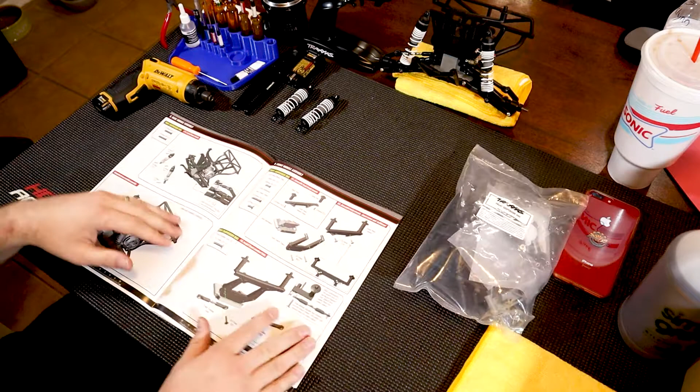What's up everybody? Welcome back to the Slash Kit build from Traxxas. Today we are working on the front suspension, so you're going to need your front suspension bag, as well as the front shocks that we built in the first video. If you haven't seen that, go check out the rest of the build series - I'm assuming if you made it this far, you've been watching along. This is part B in the manual, from page 17 to 22, and then the front module assembly, so everything for the front assembly that's going to get bolted right to the chassis. When we're done, we're going to have something that looks like that.

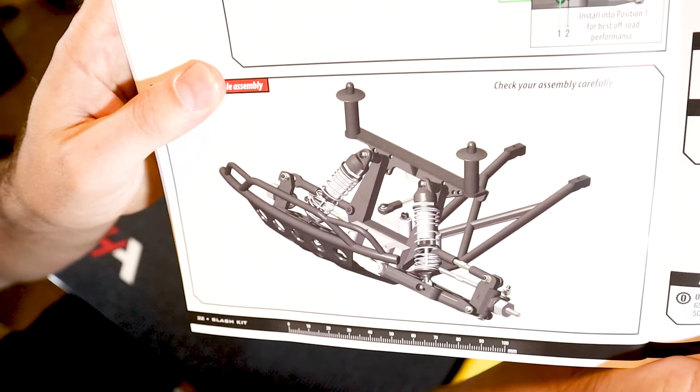So first things first, let's get this bag opened up, get all the parts out and situated so we're well organized and ready to get the build going.

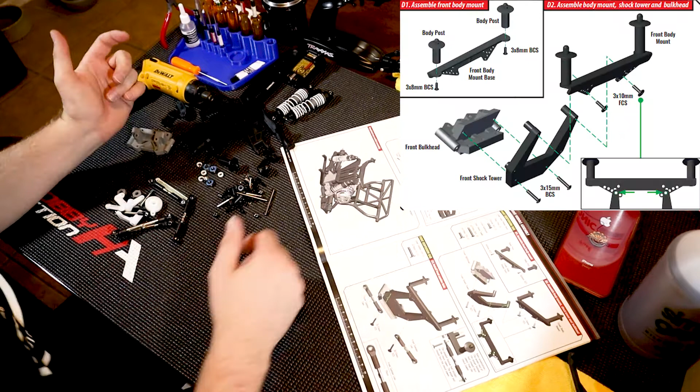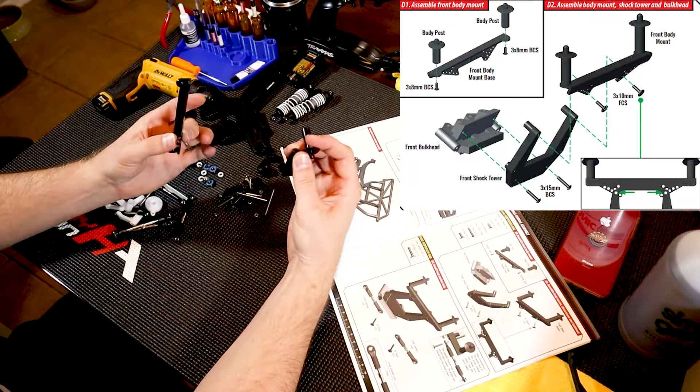So the first step is going to be starting right in the center of the whole front suspension. You can start with your bulkhead here, and your body posts and everything. So let's get these body posts mounted up. You're going to need your posts, cross brace, and some 3x8 screws.

These are just going to get bolted right up, and you'll obviously have your hole there for the pin to go through. You're going to want to line that up - typically front to back is how we do it. On the front, since there's that cowling on the body, going sideways doesn't necessarily make it that easy to get the pin in and out. So if you just line these up front to back and then tighten them down, you should be pretty set.

Got that all set to go - that's going to get mounted to the front shock tower. Not really going to matter what step you do this in. You can either put the shock tower on the bulkhead first, or mount your body post to the shock tower.

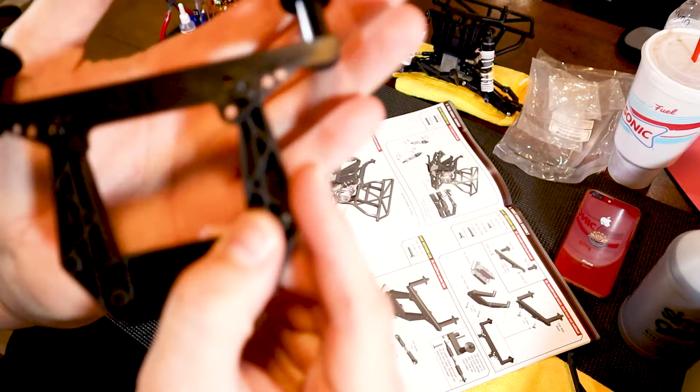Use the 3x10 screws with the giant head on them, just like your motor mount screws that you did in the past. You'll want to pay attention to the orientation on these, since the manual shows you which holes to go into - definitely pay attention to that, you don't want to put them in the wrong holes. Once those are on there, you should have it. As you can see, you've got the row of holes on the bottom, and then you've got the one up - you're going to use the one up on both sides.

Then we can get this guy mounted to the bulkhead, which uses some 3x15 screws. You're only going to be able to get the tower in there one way where the holes actually line up - basically you're going in from the same direction that you did the body posts. Use your 3x15 screws and tighten those down, and it should look like that.

Going in from the back side here - this is going to be the front of the truck, so it's going to be facing that way. Now you're going to get your longer screws with the giant head on them, and these are going to mount your camber links.

And like my last video, you saw me talk about this notch or marking - you can see how part of it's got that line in it. You always want that to the left side of the vehicle. So if you do all of your rods the same way, to the left with that marking, all your adjustments when you go to adjust your camber or your toe are going to have the same effects, instead of turning one clockwise and one counterclockwise - so you get the same effect, you know what I mean. Make sure you're orienting them the right way.

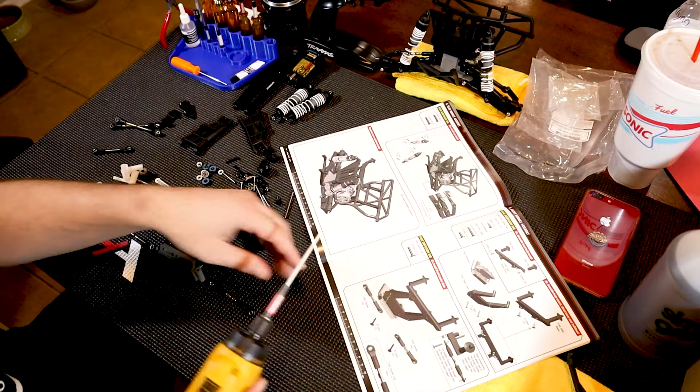There's only one hole on the tower that those are going to mate up with, so it's pretty hard to get confused. Then you want to keep in mind that there's two different size hollow balls.

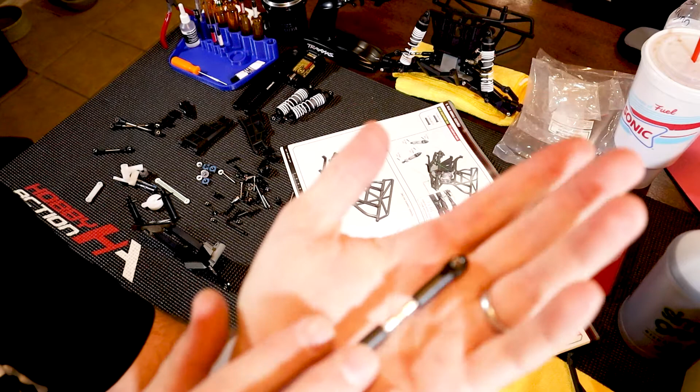It's the smaller hollow ball that gets put on the inside here on the tower. So you've got your link - there we go, you've got your link. You can see the shallow ball there, and then on this side you've got the wider ball. It's the shallow ball, the narrower one, that goes in on the tower.

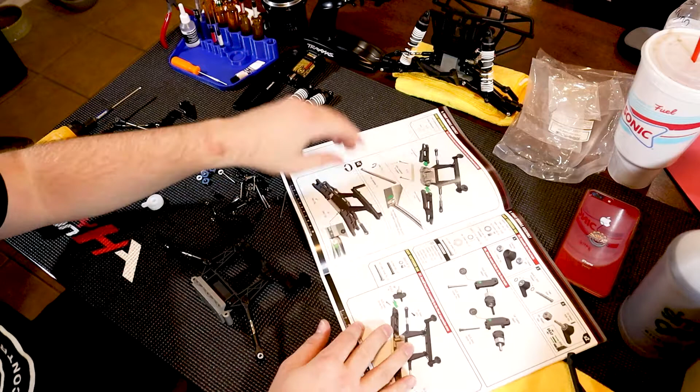Just make sure they're nice and free. You don't want any binding on any of your suspension parts, so always make sure you don't over tighten any of that. You want them nice and free moving so we don't get any unwanted binding in the suspension that's going to cause weird behavior from it.

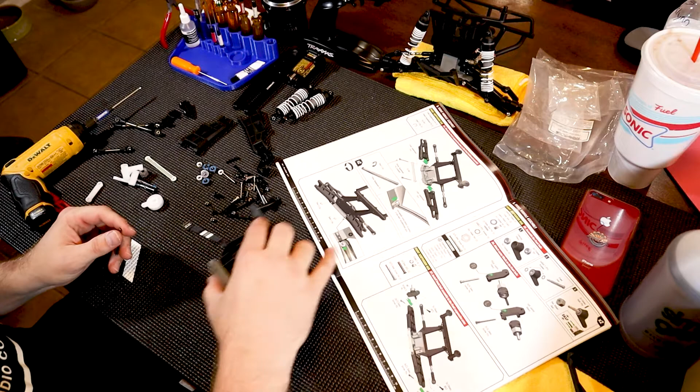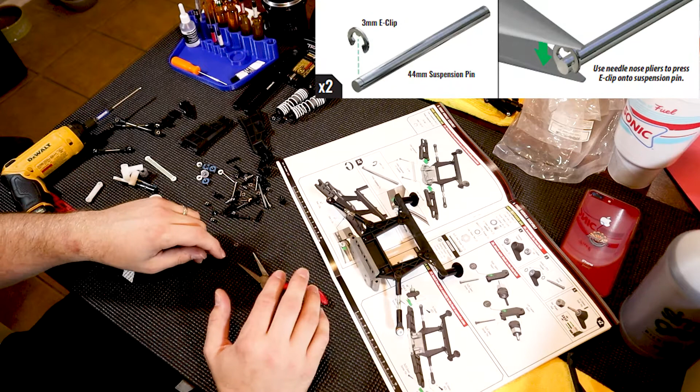So this might be the worst part of the build. You've got the two inner rods here that are going to hold your control arms on, and these parts actually use the old style E-clips, which can be a bit of a pain. You'll definitely want some pliers, and just take your time with them. Don't try to push it on there if it's a little cockeyed, because it can spring load it and then fly off, and you end up losing the clip.

Go ahead and get both of the rods, and then put a clip on one end of each of them. You can go ahead and put that clip on before we go any further, just on one end though - don't do both ends - but it'll snap on into that groove.

Not really the easiest way to do it. Just take your time and make sure you're not forcing it and causing it to pop off and fly in a certain direction. So just line it up and then click it on. Don't do what I just did.

So you've got both your pins with an E-clip just on one end of them, and then we can use that to slide everything through and then lock it in.

Now these arms, unlike the rear arms, aren't left and right - they're more universal, so they'll work on either side. Just make sure you have them facing the proper direction with your lower shock mounting holes on the front side of the vehicle. As long as you've got that, everything should be set.

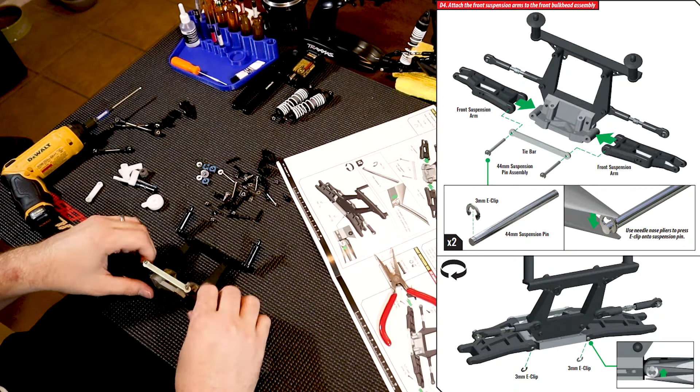They also use this fiberglass tie bar up front for a little added rigidity, just to strengthen it. So you can put that on both your pins, like so, and then slide your pins from the front on both sides at the same time through your arm, through your bulkhead, and all the way through. It should line up and go out the other side.

When they're sticking out the other side, you can do the clip on the back side now, so you're going to have to get a clip on both of those pins just like you did the other ones. It's going to be a little more difficult just because it's already mounted to the body or the bulkhead. So just take your time, use your pliers if you need to, get them on there. They give you a little pointer in the manual, but it's not always the easiest thing to do.

So this is probably the most frustrating part of the build. Everything else has been pretty straightforward. Maybe that's why they pre-built the shocks - because they felt bad for you having to use these, but still.

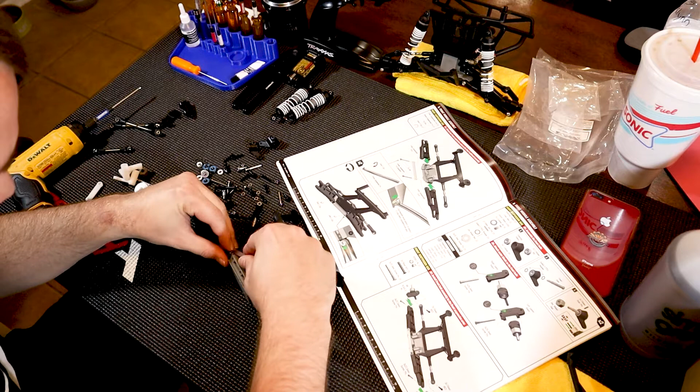Definitely don't want these flying off, because I'm looking through all the screws and stuff here. They don't give you any extras of these, unless there's some in that extra parts bin, but definitely don't want to lose these. If you do, you're going to the hobby shop to buy a pack of their Traxxas part number 1633. Don't ask me why I know that, but that's got their assortment of all these extra clips in it. So if you lose one and need more, Traxxas part number 1633 will get you what you need.

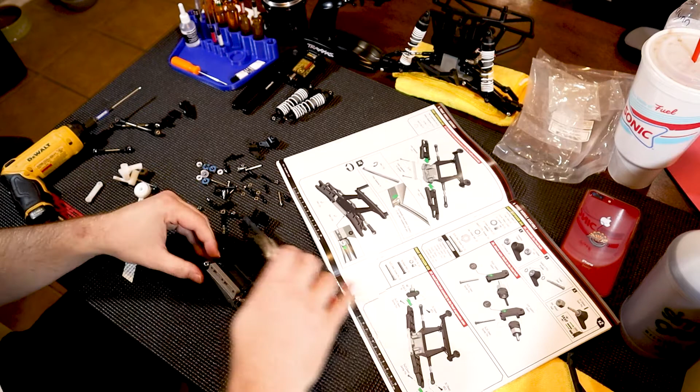Alright, got those on. Frustrating part, consider that over.

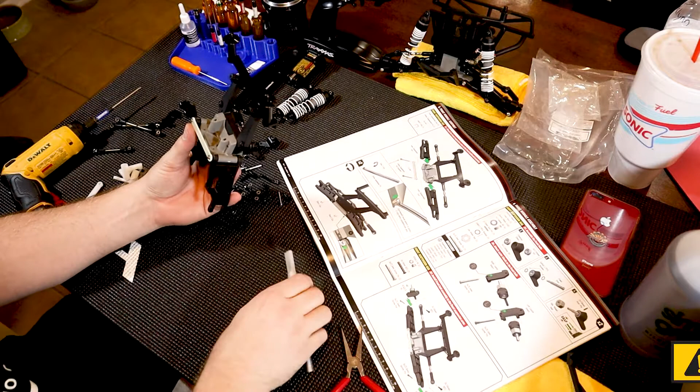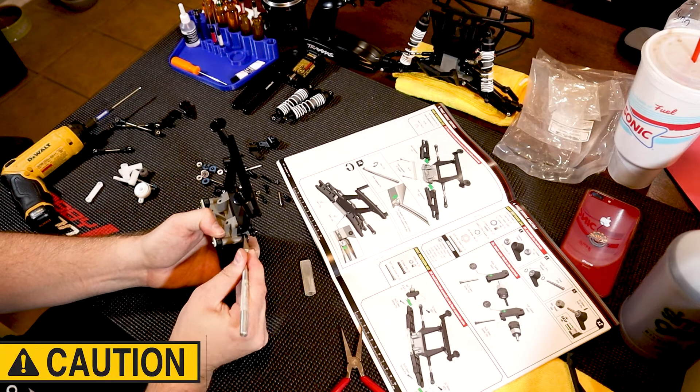Definitely want to move your arms, make sure they're moving freely. That one does, but this one's binding a little bit, so I can see a little material where they cut it off the runners when it was molded. I'm just going to get my knife in there and take some of that material off so it's not rubbing, and that should free it up. Just be careful using a knife, don't cut yourself. Take a little bit off, it's not going to take much. There we go, nice and freed up again, the way it should be.

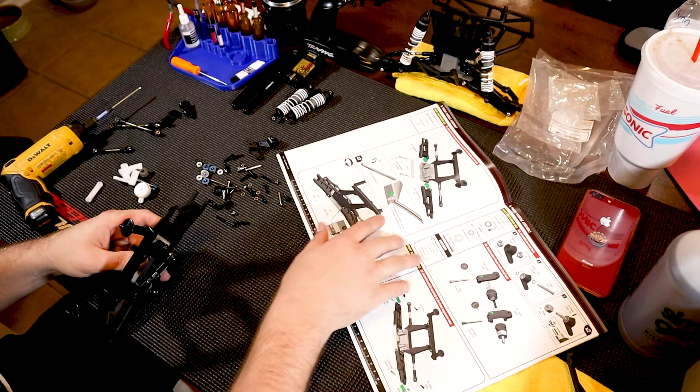Now that we've got that done, we can start building the front caster block and hub assembly.

So you've got your caster block and your steering block. Your steering blocks, these guys here, are universal, so those will work on left or right. Your caster blocks, however, which are these guys, have an L and an R on them, so you'll want to pay attention to orientation. They definitely have a right side versus a left side, so that's something to pay attention to when building them. Right here in the manual it shows the right side and the left side, so make sure you're paying attention to the orientation.

But first we're going to get the bearings into the bearing carriers, or the steering blocks, and make sure they're seated all the way. They can be a little tight, so make sure they're seated properly. You don't want to bind up the drivetrain at all because they weren't seated properly.

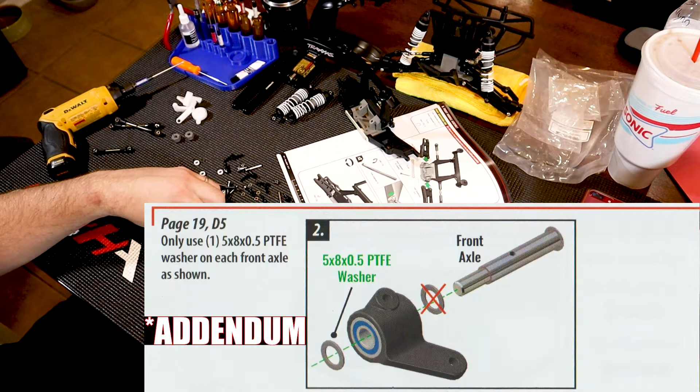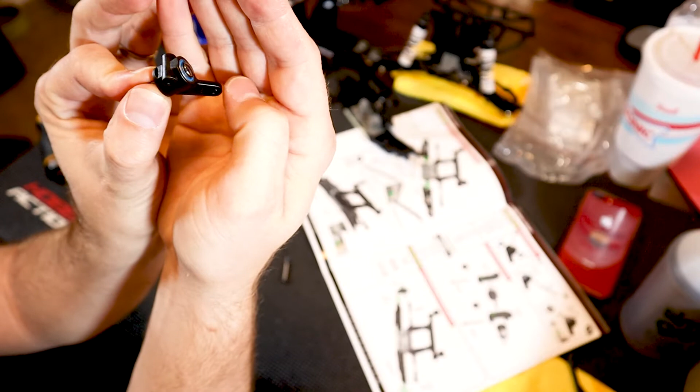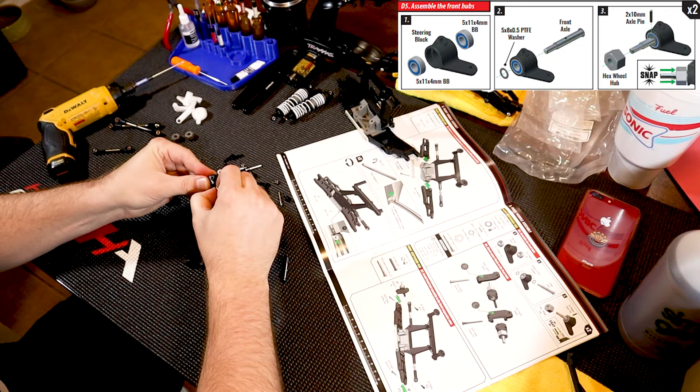Then just like we did in the previous video for the rear axles, you're going to have your pin that goes through, and your hex is going to snap onto that. This is the front end, so these hexes are a little different than the rear hexes. They're a little wider, but that gives you the proper offset for front versus rear. Just like the rear in the previous video, they're going to snap on, so you can hear the snap. Push them firmly, they'll snap on, line up the groove. You've got a groove in the hex that's cut for the pin, so that'll line up with the pin, and that's what it's snapping onto.

Snap, crackle, pop. So right, left - these are important that you get in the right way, otherwise you're going to be limited on your steering and wonder why you don't have full steering. But basically just line it up like the picture shows you here with your right versus your left.

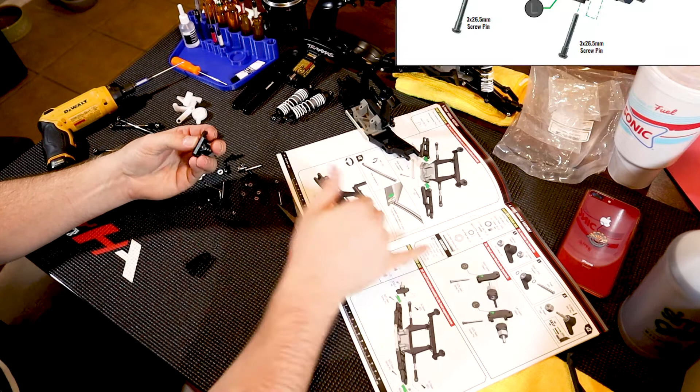And then you've got your long screw pins here with the fine thread on them. There are two different size lengths, so you definitely need the longer of the two for these ones. Pick out the two long ones, put the two shorter ones aside - those are for the next step.

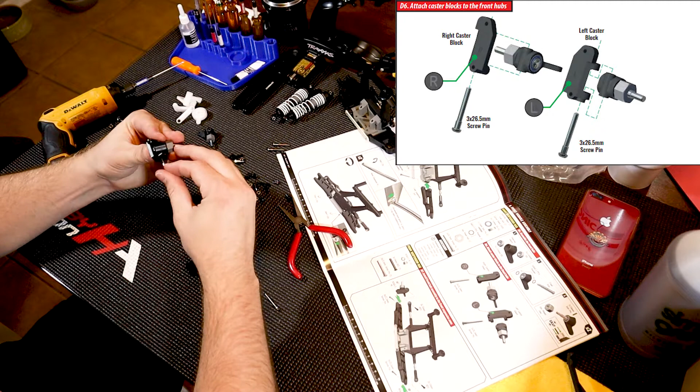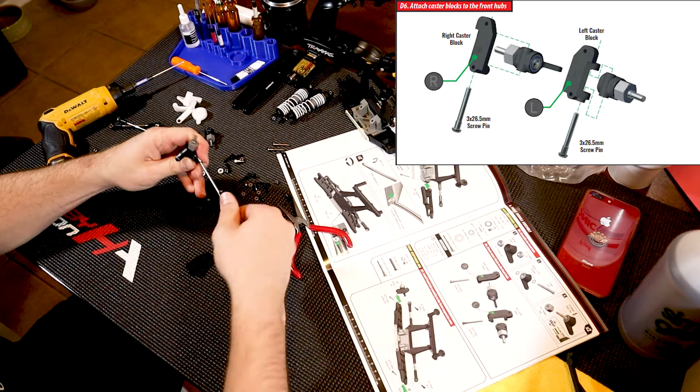So the two long pins are what you're going to use, and you're going to go up from the bottom and slide it all the way through the steering block, then line it up with the top hole on the caster block. Once that's done, you can thread it in and tighten it up.

Make sure everything's nice and free, don't over tighten that bolt. You don't want to do that because then you'll bind up your steering and cause more stress on your servo, which you don't want to do. The servos are under enough stress as it is.

Rinse and repeat for the other side. Just make sure you're orientating it in the proper direction since it's the left side versus the right side. Nice and free - those are all set.

And then with those built, we can bring the front end back into it, and we're going to end up using these screw pins and getting everything mounted to the chassis. So we're going to mount everything on the lower end first, and then we'll link it up with the camber link on the top end.

So use those shorter screw pins that you set aside, and use those on the bottom here. Slide them through just like we did for the steering block, slide them through and then thread them in. Again, make sure you don't over tighten them because you don't want to cause any extra problems in the system, so that the suspension can do what the suspension needs to do. Just snug them up, make sure everything is free.

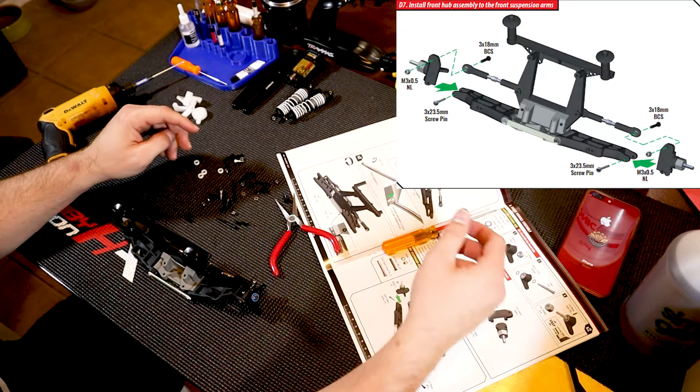Alright, nice and smooth. You've got two M3 nuts that we need, as well as two 3x18 screws, which are those guys. These are what we're going to use to mount the camber link, which is going to mount up to the top of the caster block here. Put the screw through the back side, and then once that's all the way in, you're going to secure it with a nut on the other side.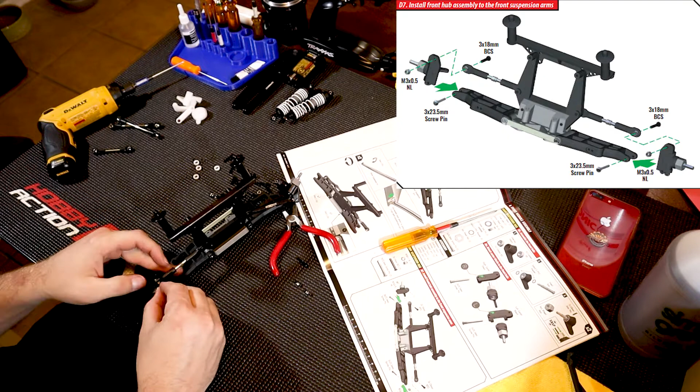To lock everything in, so that way it can't back out on its own. You definitely don't want that backing out. Once you got both of those screws in, just go ahead and do your nut on the back side. You'll probably need a driver in the screw and then a nut driver on the nut to fully tighten them down. Otherwise you'll start tightening up the nut and it will just back out the screw. So use your driver and your nut driver and tighten both those nuts down, making sure they're nice and tight.

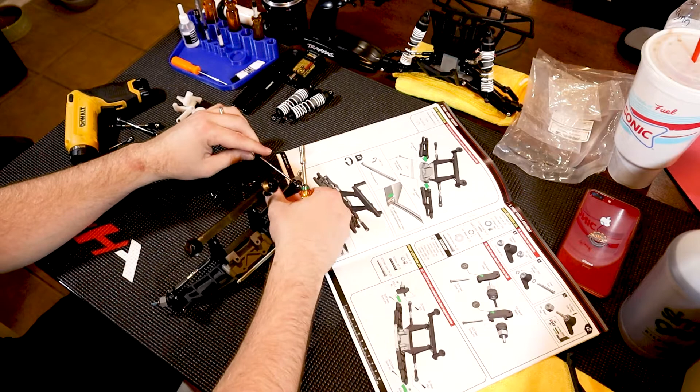These are nylon lock nuts, so they shouldn't back out under use while you're driving the truck. As long as they're tight now, they should stay and pretty much not go anywhere forever unless you take them off. Set that aside for a minute because we got to start working on the steering rack.

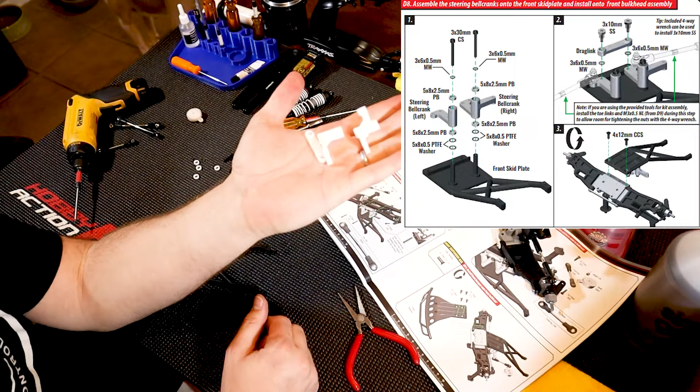You've got all these three pieces here are for your steering assembly. This is what's going to build the rack that translates the steering servo movement into turning the wheels. So you definitely want to pay attention to the order of stuff. You got a lot of use of the PTFE washers and everything, so definitely make sure you didn't lose any of those. Looks like you need 4 total.

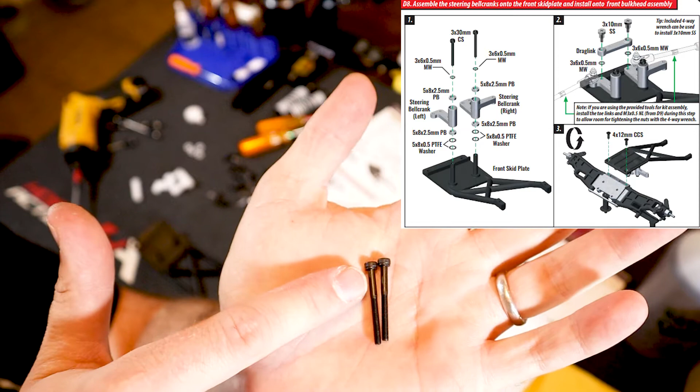You got these little white bushings that they're using instead of a ball bearing. Those are going to go into the steering rack too, and then you've got some other washers that are going to go on top, and then you've got your 3x30 screws. They're the only screws in the bag that aren't fully threaded, so you can see the non-threaded part there. These are the screws you need to mount the bell cranks to the skid plate. That's what they're going to pivot on.

So we want to go ahead and put all these bushings in the openings, making sure they're pushed in all the way. If they're not, they're going to cause resistance in it, and that's going to put more stress on your steering servo. So you want to make sure those bushings are pressed in all the way. They're not too tight, so it should be fairly easy, shouldn't take much force.

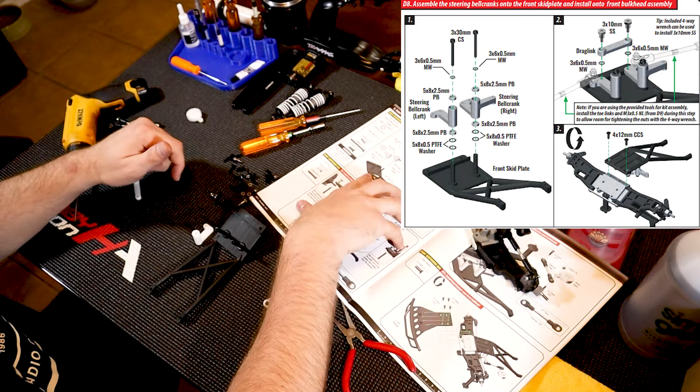And then we definitely want to make sure we're paying attention to orientation. We've got 2 different cranks here, so you want to make sure you're orienting it the proper way. We're going to put 2 PTFE washers on each post, 2 on the right, 2 on the left. And then we can place our bell cranks down on it, again making sure they're oriented the right way, and that way everything works together.

And then you've got 2 of these small 3mm washers that go on top, which may or may not have a little post to sit on. Put them on the screws. So if you put the washer on the screw and then the screw through, you're not going to worry about losing the washer.

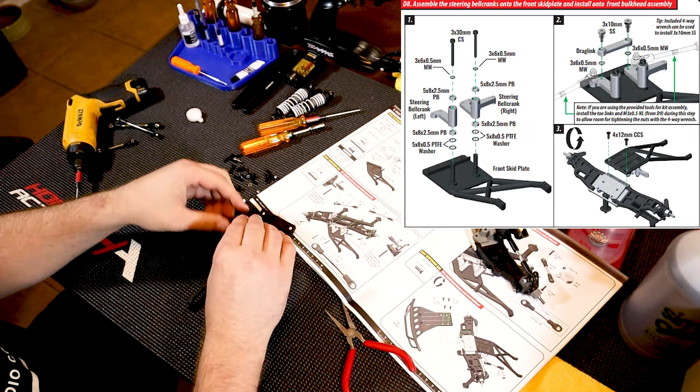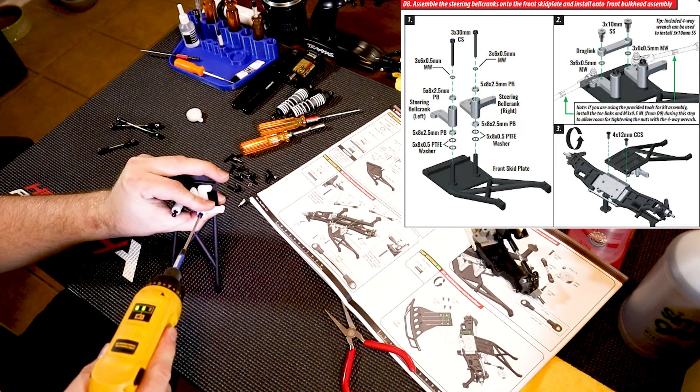And then you can go ahead and tighten these down, again making sure that they are not fully tight. So you want the free movement here. You don't want any extra resistance in the system, because that's just going to translate into stress on the servo, and we definitely don't want any added stress on the servo, because the servos have enough to deal with, they don't need any extra stress. So just snug these up. Run them the rest of the way in by hand. And we still have free movement, but everything is secure on there.

Alright, so these need to get linked together. I forgot to put the drag link in, that's my bad. There it is, hidden. I'm not missing anything. But you've got these 2, which are Phillips head, so I need to go grab a Phillips driver real quick. These are 2 that are going to put your drag link on. They've got the shoulder on the screw there, so the drag link can pivot but still be secured to the bell cranks.

So give me 1 minute. I'm going to go grab a Phillips and I will be right back. A few moments later. All right, Phillips head.

Now that we're fully prepared, let's get this. So you've got the 2 holes on your bell cranks. It's going to be the inner holes for the drag link. The outer holes are what your steering link's actually going to bolt to, to translate it to the wheels. So we definitely want to get this on there properly.

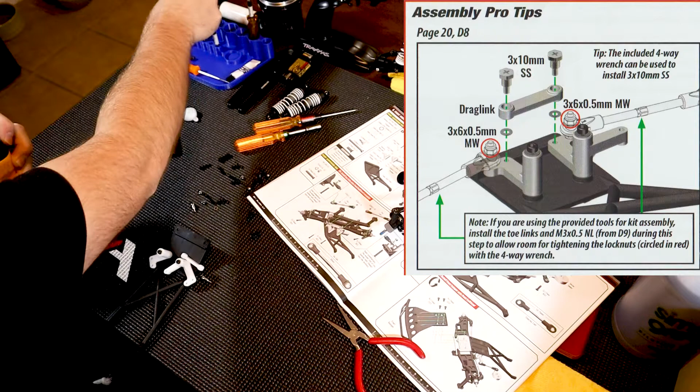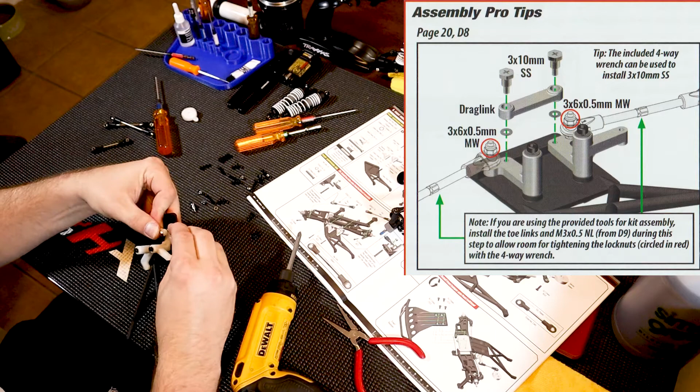Shouldn't matter what side is up or down on your drag link. But you do need to put this in, and then you can use one of the washers on the bottom side of the screw before you put it onto the bell crank itself. Make sure you don't forget that washer. It's very important, it's what's going to help keep the steering nice and free and keep it from binding up. So you definitely want to make sure that washer's on there. And then, as with everything else I've been talking about, don't over tighten it.

Everything's nice and free moving, not binding. Then we can go ahead and put this back on there, now that I'm not missing any steps.

Bound to skip 1 step while you're doing a build. Just a given, right? I'm allowed 1 goof. So no more goofs, I've already used it.

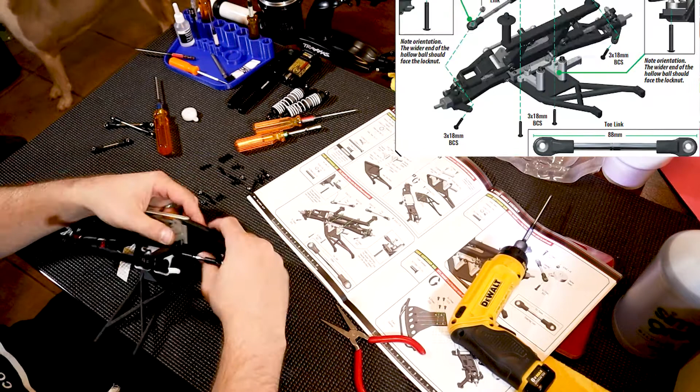All right, now moving on, we can do our toe links, which are our steering links. So those are going to be the 2 longer links that you set aside earlier. They're again going to be orientated with the notch to the left of the vehicle, that way we're keeping everything consistent. We've got some 3x18 screws for both sides, plus you've got the M3 nuts going on both sides.

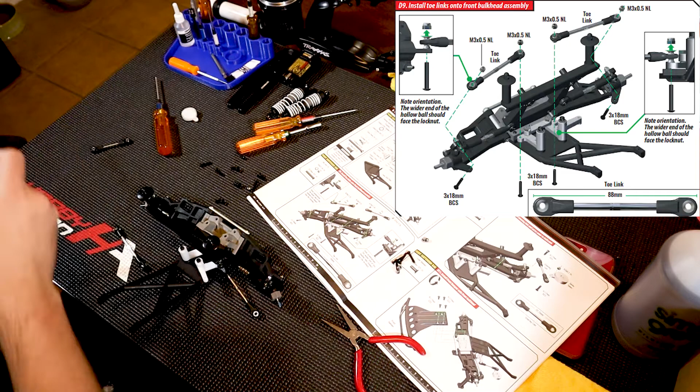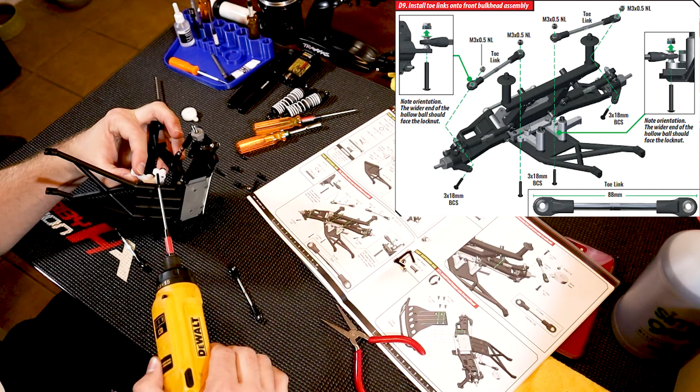So, all your screws and nuts ready, and then we can start putting them in. I am gonna put probably the inners on first, I feel like that might be easier. We gotta get into the bell cranks, and we're a little limited on space, so we can do that first. You put the screw through the bell crank, screw it in through that hole all the way up, and then the link is actually gonna sit on top.

Very tight plastic. Just be careful when the plastic's that tight. Obviously you don't want to go crazy with the amount of pressure you're putting on it, because you don't want to crack the plastic. So go easy on it.

If it is that tight and you have some of that grease laying around, you can put a little bit of grease on the threads. That'll help the screw go through there a little easier. Didn't seem to be forcing it too hard on that one, so I didn't worry about it. But pro tip there, put some grease on it.

And you're gonna wanna put the toe link over the screw, and then you're gonna have a nut to tighten down onto that. So I'm gonna get both these started, and then I'll tighten both of them down after I get both of the nuts on. And these are again nylon locking nuts, so they shouldn't really back out on you, so you really shouldn't have to worry about that.

Snug those all up, that way everything still works freely. The inside toe link mount on the bell crank can be a little bit annoying just because you've got the shock tower and everything in the way, so finding the right angle to get your drivers on there to work properly. But we managed.

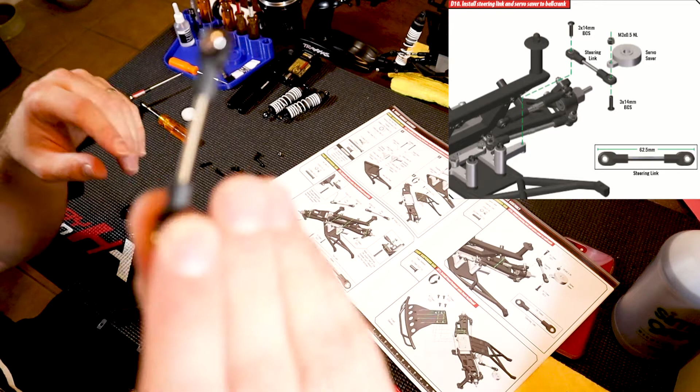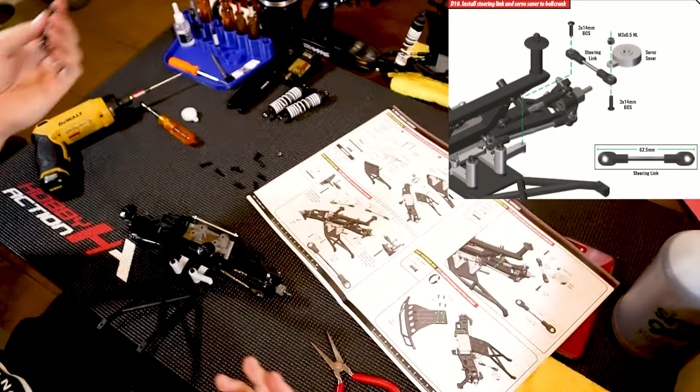So this other guy here, which is just the fully threaded, you don't have the center adjustment like you do on your camber and toe link. This is just the steering link, so this is gonna link it from the steering bell crank, which is on the truck, to the steering servo, which is also on the truck, but it's the actual part that turns the wheels.

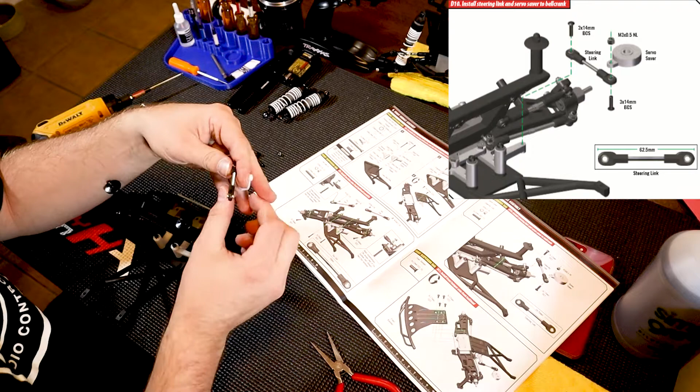So I'm going to go ahead and mount the servo horn, servo saver. There's actually a spring inside this which, when you hit the front end or the front wheels and it sends a shock through the system, instead of sending that shock to the steering servo, it actuates the spring in here. But this is the actual piece that mounts to the servo, so we've got to get this mounted up onto the truck.

Then we are going to put the screw up through the bottom, the link through the servo saver, and capture it with a nut driver and your hex driver, and just tighten this nut down. Later on, when we put the servo in the car, the servo saver will actually get hooked up to the servo, and we'll go from there.

For the other end, just go down with your 3x14 screw into the last remaining hole on the bell crank. No nut involved on this one, just straight into the plastic. It's going to self-thread. Run that up, make sure everything rotates freely, and then that portion is done.

We got the steering link on there, ready to mount to the chassis and hook up to the servo at the proper time. Now we need to mount the front bumper, which I think is all we have left.

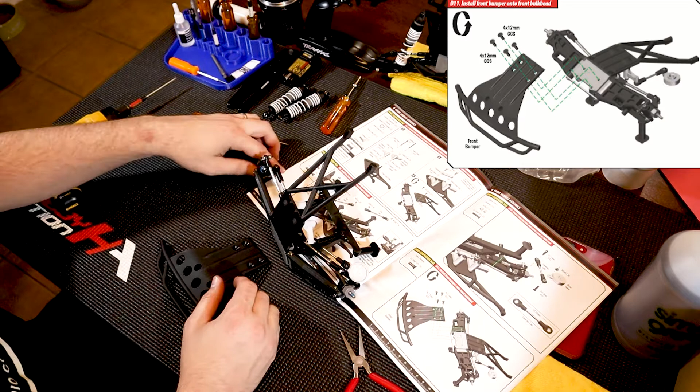So we've got the 4 screws here on your bumper. You're going to use these big M4 screws, and those mount to the 4 holes on the bulkhead there. Always start with one, keep it loose, just line everything up. There's no guide pins or anything on this, so you just got to line them up with the screws. Get all 4 in loosely, then start tightening them up one at a time.

Alright, front bumper is on.

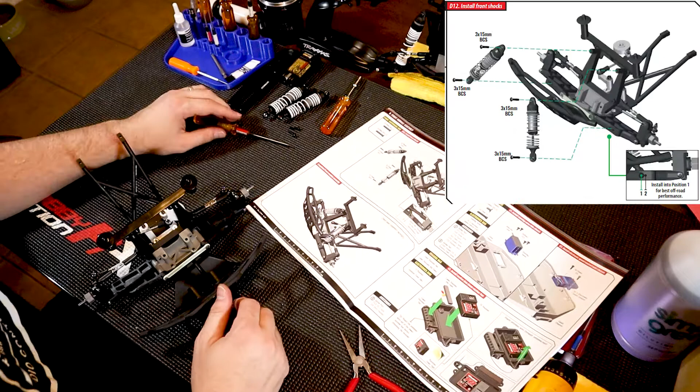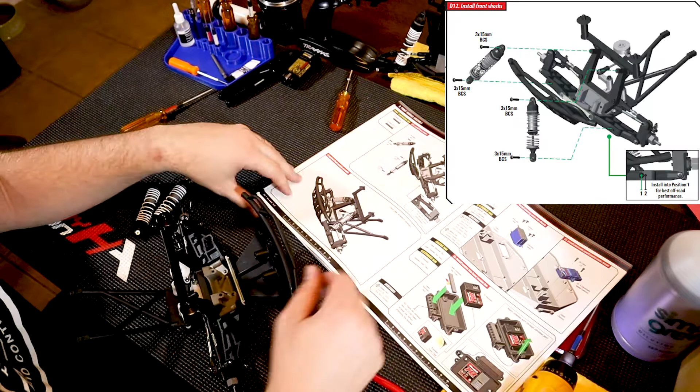And then lastly, we've got some missing screws, methinks. I've got 2 screws to mount the shocks. Where's my other screws? How lovely of Traxxas. Let me just move some stuff around, make sure I'm not missing anything. Well, Traxxas strikes again. Well, I shouldn't say again, they haven't done anything wrong yet. At last, we meet for the first time for the last time.

I've got the 2 lower shock mounting screws. I am missing the upper mounting screws. So we're going to get as far as we can with that, and then hopefully in one of the other bags later on in the build there might be some extra screws, or they're just missing and I get to call Traxxas and have them send me some screws. But we will get as far as we can.

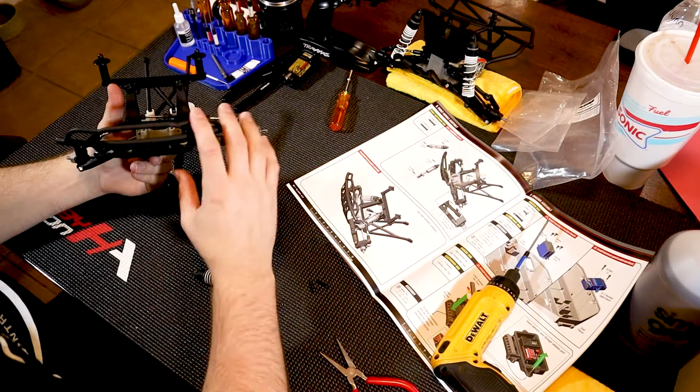So I've got the 3x15s, which are the lower mounting screws. I'm missing the 3x15s, but basically you're going to have one mount on the top, one option on that, which is the shock tower right here, and then you do have 2 positions on the lower there. You've got your inner and your outer. They're telling you to use position 1, which is the inner, so more of a vertical alignment on the shocks. So we're gonna do that real quick.

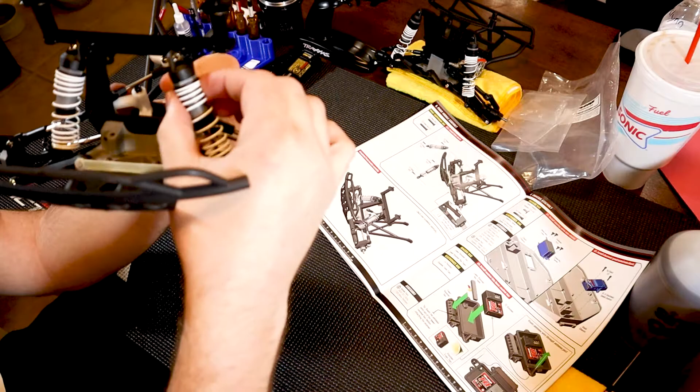Just get that lined up, at least in the lowers today, and we can kind of go from there. Hopefully get the extra screws there. Alright, well that's as far as we're gonna get without those upper screws. But there's your front module assembly. Obviously these would be screwed in had I had the screws. But you got your bumper and everything all together with your steering bell cranks.

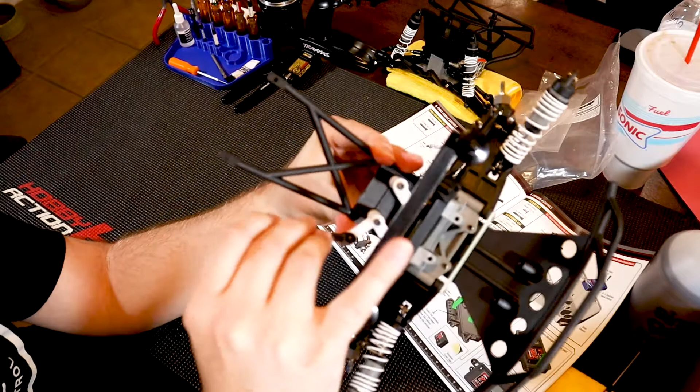So voila! That was portion D of the manual, building the front module assembly. Thanks for watching. I hope that made things a little easier for you.

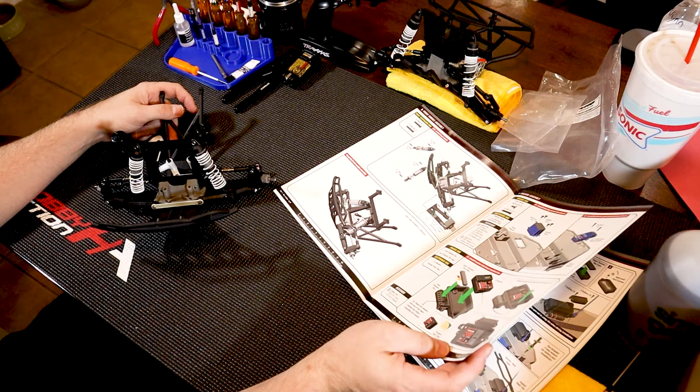My due diligence skipped a step, so we're going to take that back off real quick. This is why you pay attention. Probably link those bell cranks together, right? With the drag link. You think that's kind of important? It needs to be done before this is on.